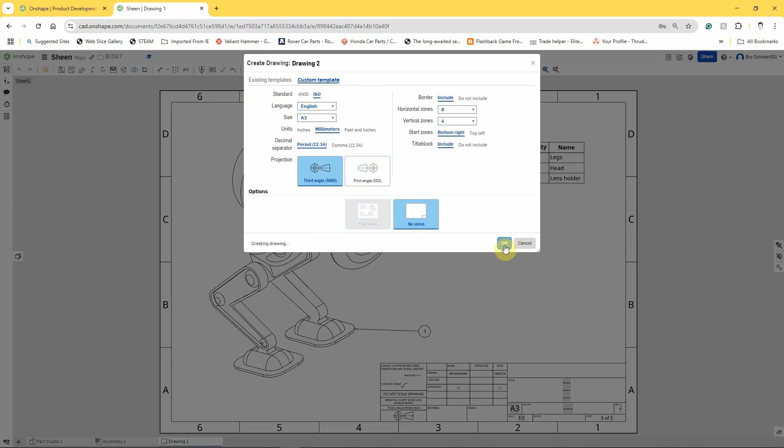Left click on the plus sign, left click on create drawing, and we're going to go custom template, ISO, A3, third angle, and click OK. Wait for the software to load up the drawing, and then we can bring in the model.

We can use orthographic drawings for assemblies, and we can also use orthographic drawings for parts, usually with dimensions on there so we know how big to make the parts. In this instance, we're going to do it on the assembly. So left click on assembly and bring in our assembly.

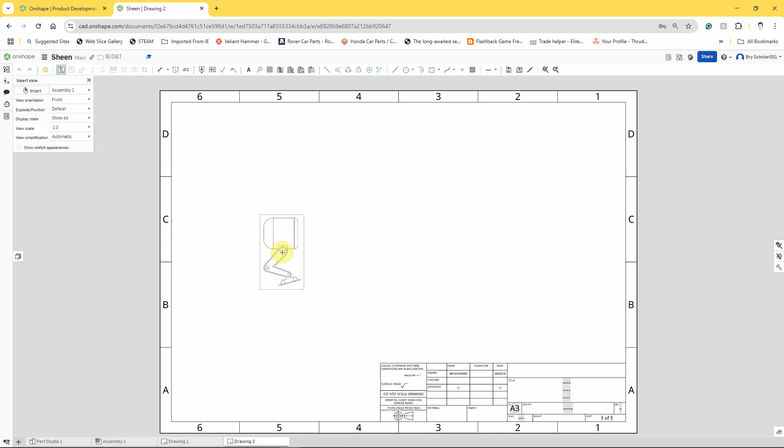It takes a little bit of thought to think about what view we want to start off with on our model. So this is the front view. I'm going to pick the left-hand view. I'll show you why in a moment.

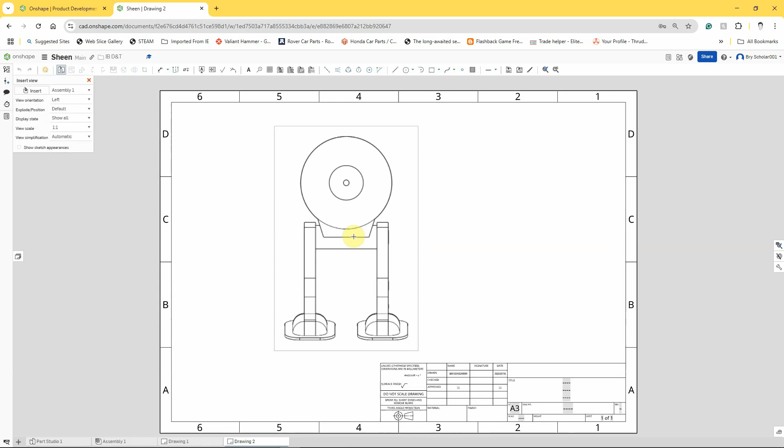I also think that a third scale is perhaps a little small. That's probably a bit big for what we want to do. So let's go between the two and go half scale. There we go. Let's plonk that down in the middle.

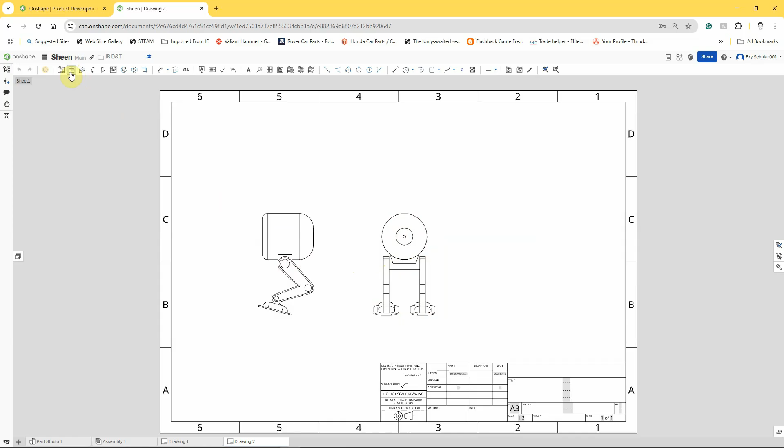The way an orthographic drawing works in third angle is over to the left we would see what it would look like from the left, and it's the projection view tool that we're using at the moment. It's what it defaults to.

Click on that again, and we'll do the same above. So this is what it would look like if we were looking down from above. Now the reason I want to show you this is because we could do section views as well.

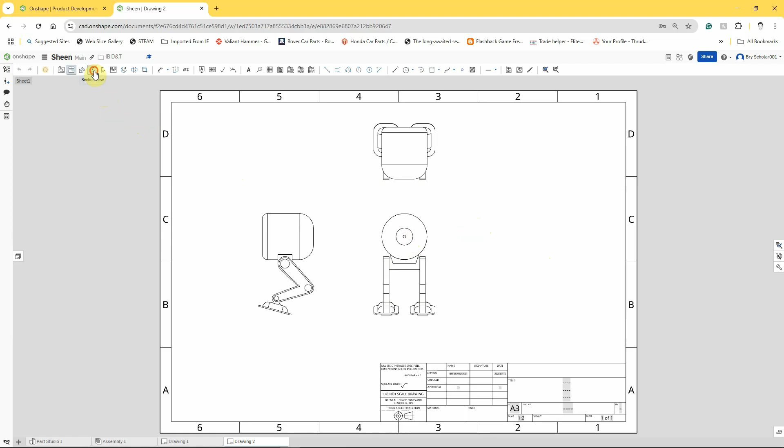So let's over here add a cross section view. We're going to do a section view, vertically, which is defaulted to. I'm just going to pick up the middle and put it over here.

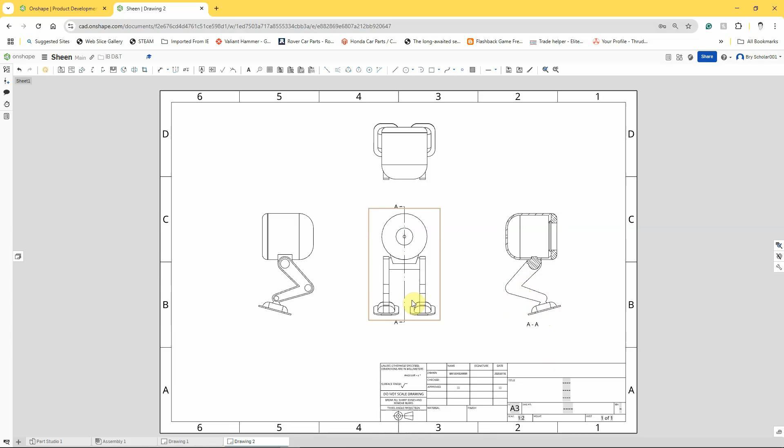That is what our lamp would look like if we were to saw it down the middle. So the hashed lines show where a material would have been cut, if we'd gone through it with say a hacksaw, and where it's not hashed, that means we've not cut through the material. As you look, this would be viewing in the direction of the arrows, and we haven't cut through the legs or the foot.

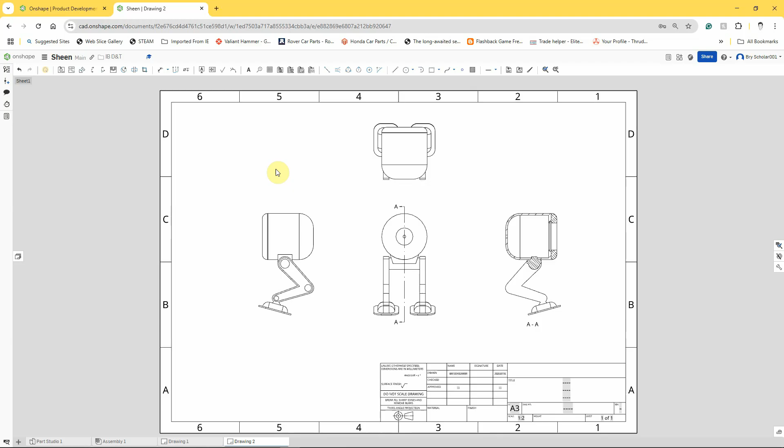We could just leave it like that. We could add some dimensions on if we wanted to, perhaps an overall height and an overall width. But that works quite well to show how the different parts fit together. That combined with our assembly drawing in isometric gives quite a clear idea of how the parts fit together.

And now a challenge for you. You've followed these video tutorials through, and well done for making it this far. There's a couple of things I would like you to have a go at to see if you can do them. The first one hopefully is quite straightforward.

I would like you to look at a way in which you could make the lens cover attach to the head or locate to the head in a more positive way. At the moment it just fits over the top and it would slide around, it would have to be glued. Is there a way we could make a more positive location, similar to what we've done here with the pin in the hips of the legs, connecting to the head? So that's the first challenge.

The second challenge is, can you model a GU10 light bulb and fit that into the assembly? So whether you find a GU10 bulb, measure it even if it's approximately, and create a model of it, or whether you look for the technical specification information with all the dimensions online and use that information, can you model the bulb? You could either do it in the same part studio, or you could create a new part studio for it, but have a go at modeling the bulb and then putting it into the assembly.